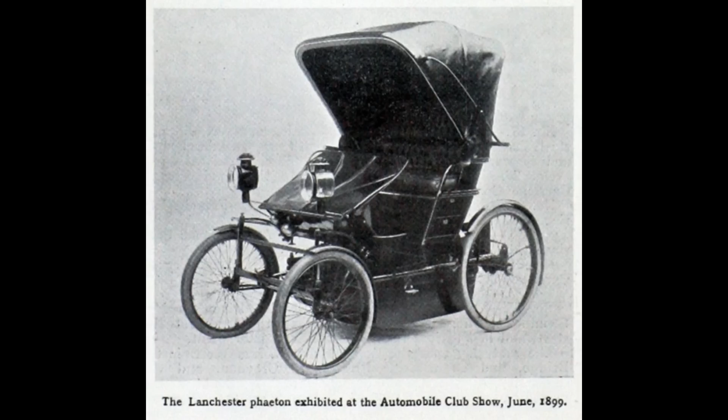That was the experience of lots of these little car companies, including a car company you've probably never heard of called the Lanchester Car Company. The Lanchester Car Company was set up by three brothers, Frederick, George and Frank, and what they aimed at was solving the problems of the car. They were extraordinarily innovative because Frederick was a very well-respected automotive engineer, and he brought his brain to the problem, and they came up with some astounding things.

They were the first company to create disc brakes. They also used epicyclic gearing in their gearboxes. However, they went bankrupt only 5 years later in 1904. The receivers came in, reorganised them, they ended up being owned by Land Rover, which of course is now owned by Tata. And the big issue that they had was it was just too expensive.

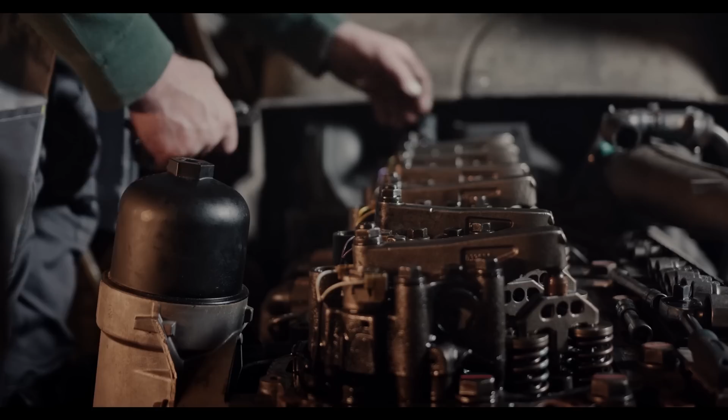Now, one of the issues that they looked at was the nature of the drive. If you think of a car now, it's 4 pistons in line, and of course they explode and lump through. The ride in a car back then was particularly rough, and the Lanchester brothers wanted to solve that problem, and they created something called the Rhombic Drive.

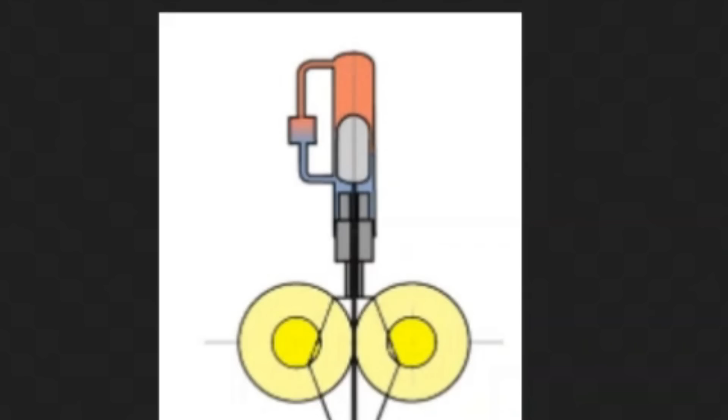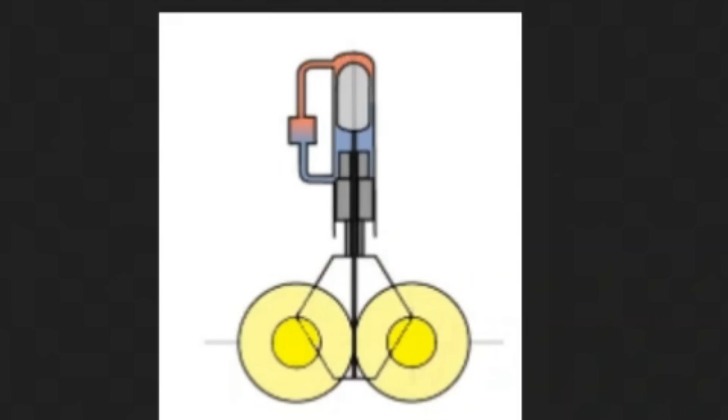In a rhombic drive, a rigid piston rod is connected to one side of a rhombus instead of a flexible rod connected to a crankshaft. As the piston moves, it deforms the rhombus. As the rhombus deforms, it's attached to 2 cranks, gears, flywheels that move in opposite directions. This distorts the other side of the rhombus, so first it flattens out, returns to its shape, and then flattens on the other side, at bottom and top dead centre.

Now, the benefit of the rhombic drive is it gives a very smooth movement from linear to rotational. The disadvantage is it's more complex, there's more parts to manufacture, and the tolerances of having a double piston system like that are quite tight indeed, meaning you don't see it much in motor vehicles these days.

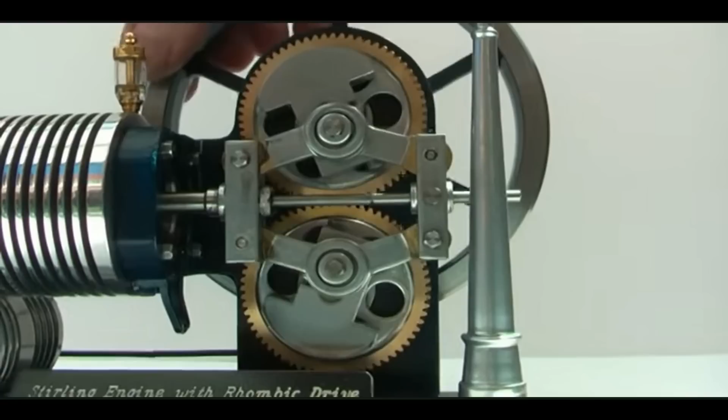But in a Stirling engine, one of the pistons isn't actually a piston, it's a displacer. The whole job is just to take up space so that the air moves between the hot and the cold side, and tolerance isn't so much an issue. So you find rhombic drives in Stirling engines even today.

So what I thought I'd do is create a rhombic drive. Now, one of the things about designing stuff is that you don't have to design everything from scratch all of the time. Here's the Tinkercad drawing I did for the hypocycloidal engine, and this is the flywheel. It took a fair bit to do, and I really quite like it, so we can reuse it in the new model that we're going to make.

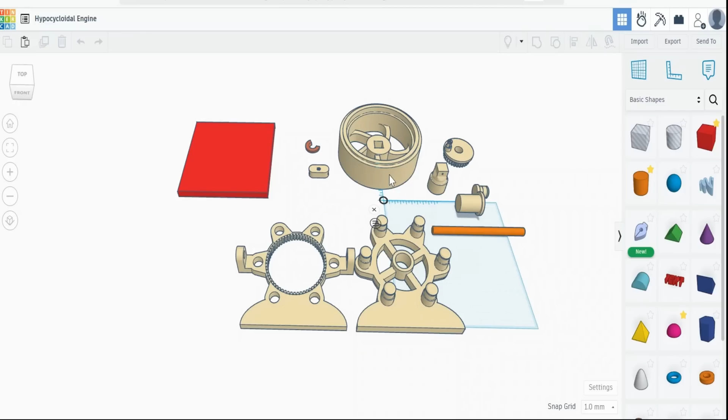To do that, just click on it and export it as an STL, and then we go back to the dashboard, open up a new workspace, and this time we can import it. And there it is. Now, there are a few changes I want to make to it because there are some things I don't like about it for this new design.

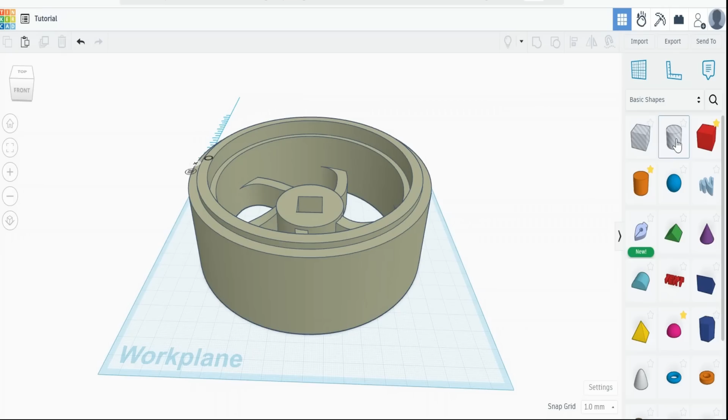For example, it's 45mm high, which I think is a bit too big, so I want to reduce it. So pull on a basic cylinder primitive that's a hole. The size of this is 150 by 150. I want it 30mm high, so type in 30 to move it 30 off the bed, and then on the size of it, type in a bit bigger than the size that you want to cut out.

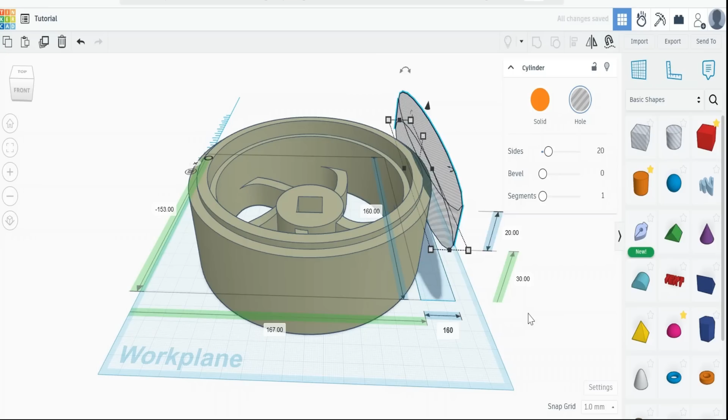Center them to each other, and then if we merge those, we've got the flywheel size I want. Now, I designed this with a square peg in the center because I wanted to link to a square peg, but we need to fill that because now I want a different kind of axle.

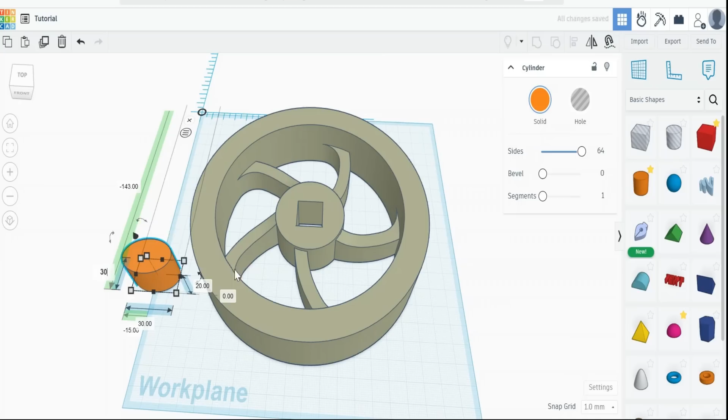So this time pull off a cylinder primitive, and it's going to be about 30 by 30. I will do that 32, so it's all the same height. Center them to each other. And if we merge that, then we'll get a flywheel.

But we want to have a center hole in it, and I want this center hole keyed. So this time, pull off yet another cylinder, and I want the axle to be 8 millimeters by 8 millimeters. And this is 30, remember. So let's make that 40 so it pokes out a little bit. It just means that we can grab it later.

Center it. And I want to key it. So I'll need a key cutting in that. I need a section of it flattened. And I want that section to be 2 millimeters.

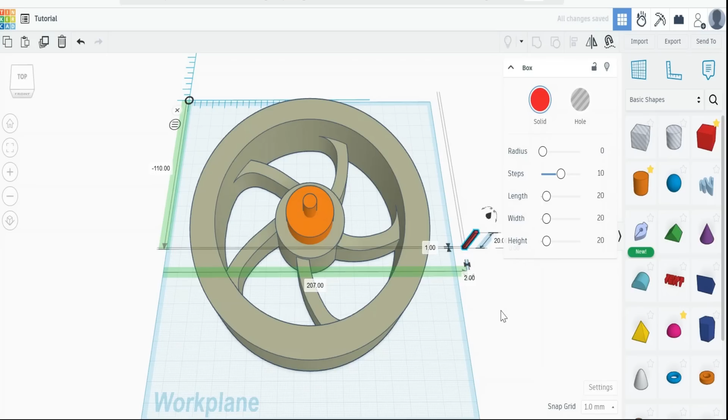Remember, this is 40, so let's make this 45. It means that we can grab it really easily. And now we need to center it to the axle. So we center it there, hit the centering, the alignment key, center it to one edge and to the center there. Now we can turn that into a hole.

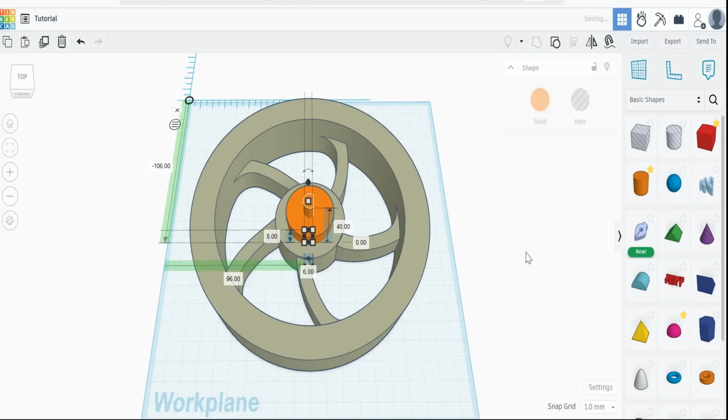We can join it with the 8 millimeter bar that we just did. So we group them, and we're going to get a flat keyway. If we click on that and now make that a hole, highlight the whole lot and group them, then we get the flywheel with a flat keyway at 8 millimeters.

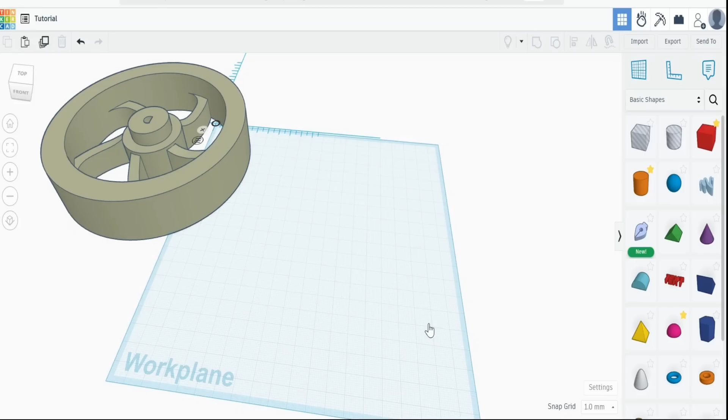The other thing that this will be really good for are the two gear sets that we need to make. But at 150 by 150, that's a bit large, so we can re-import it. But you'll notice here we've got a scale, so we can make that half the size by making that scale 50% and import it, and it will import it at half the size.

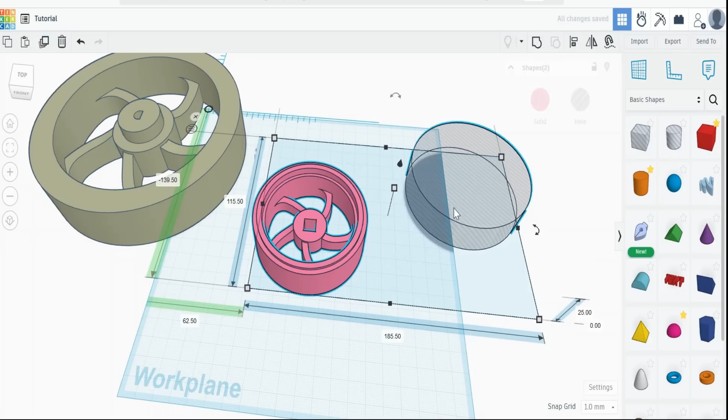And there it is. Now I want this gear to be about 5 millimeters thick, and it's 75 by 75, of course, because this was 150 by 150. So I need to shave off a bit to make it 5 millimeters thick. So if I move it 5 millimeters from the bed, make that 80 by 80, align the two by highlighting them and hitting the align key.

And then group them. We have a pretty little shape that will look nice when it comes to the gearing that we're going to do. Again, we've got this square hole, which won't do. So if we grab a cylinder primitive, smooth that out, that looks about 20 by 20 to me.

Yep, pretty cool. And then we can align those to each other. So we center it to that. And make this 5 millimeters high.

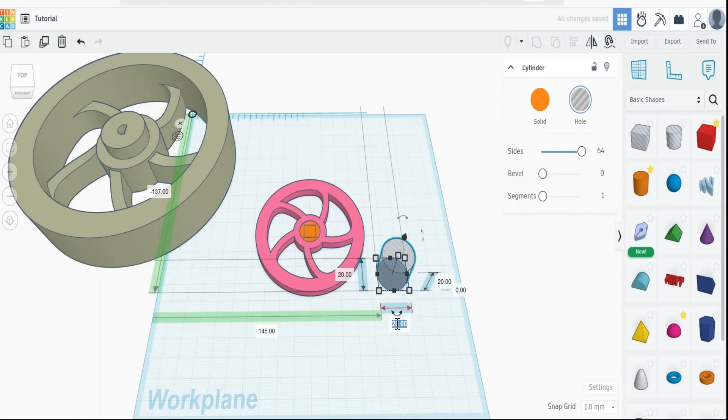And we can put an axle straight through by pulling on a hole primitive, smoothing it, 8 by 8, and then we can center the whole thing to it, group them. And there we go, we get a nice center.

Now, of course, that needs to be geared. So we go to search, type in gear, pull out metric gear. We want that to be 5 high. And you'll notice that this is 19. This is 75. So we need it to be bigger than 75.

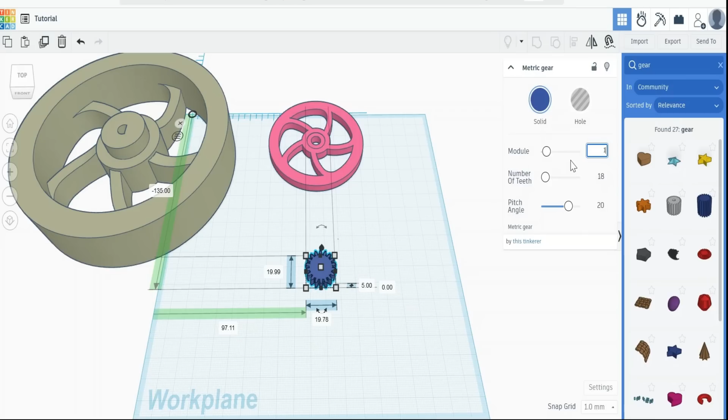Let's change the module because I think 1 is really not chunky enough. So 1.5. And so if we change that to something like 50, then we get 77. And that is 75, so we'll have 2 millimeters. It's not quite enough, so let's change it to 52.

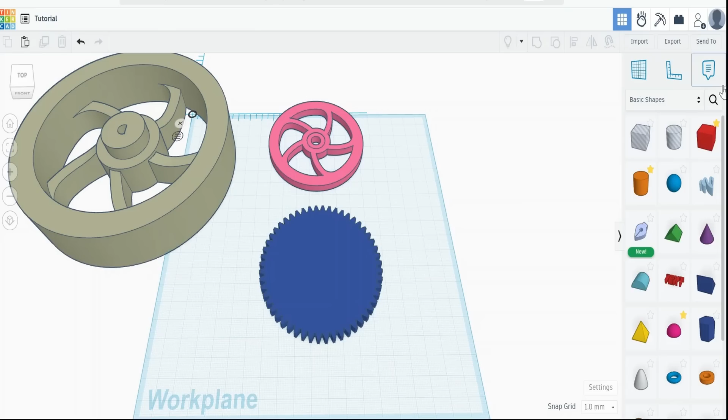Now what we want to do is place that in that. That's 75. So let's close this, grab ourselves another hole primitive, smooth the sides, make that 74 by 74, so it's just a little bit smaller than this. That means that will overlap with this later on.

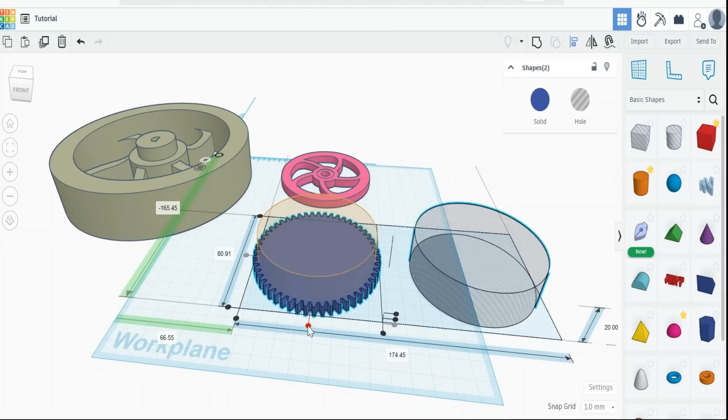And if we've aligned those two, we can check out that we're not cutting into the teeth. No, we're not. So let's group them. Then all we have to do is highlight those two and use the alignment button to align them.

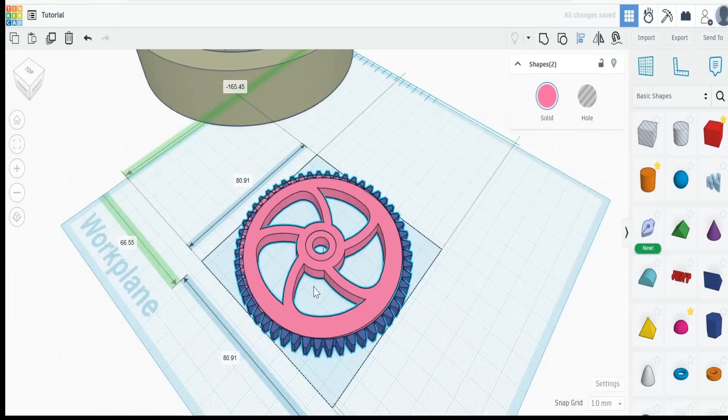And group them. Hey presto, we have our gear. Duplicate that and move it out of the way. And we have two gears and a flywheel created in a few minutes because we basically reused old parts.

Now, of course, I need to draw the other parts, and here they are. I don't plan on going into how to draw these parts because they're all basic primitives, and I have covered that in previous videos.

I will be putting these parts up on the Thingiverse should anybody want to print it off or use those parts to redesign for themselves. All I really wanted to point out was it's more than possible to reuse your parts or parts of a design to speed up your drawing process.

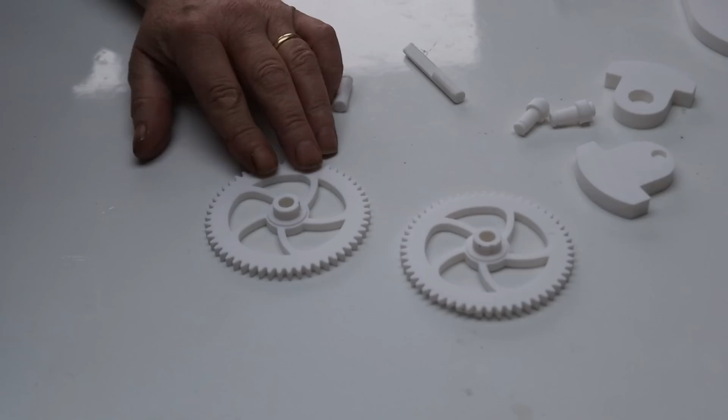Okay, let's get them printed out and put together. To put this together we have two gears labelled A and B and two axles, a long one with a flat side and a short one. Into gear B, the short one goes into the reverse side so that it's flush there, with a bit of glue to hold it into place. Then in gear A we take the long axle and shove it in there so the flat side is facing that way, and glue it into place.

And then we have two counterweights. The counterweights have this large hole with a little notch in it, and there's a corresponding notch on the gear. The counterweights go onto the notch and glue into place on both of the gears, like that. Then we take these pegs with the step in, and those pegs go into the counterweights right there.

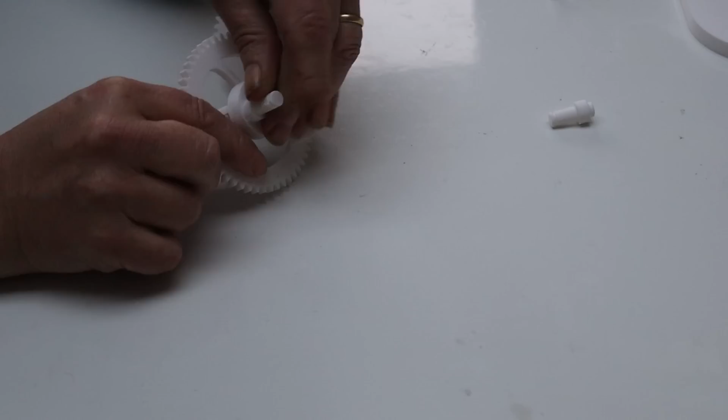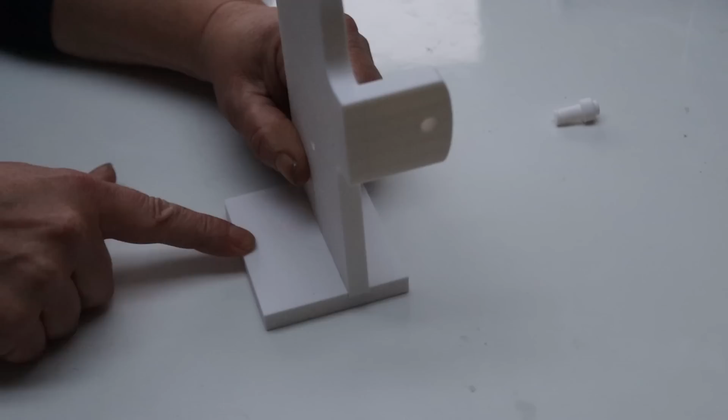Then we have the base and the back plate. The back plate's got this angled section, and you glue the back plate onto the base so that the long side of the base is back and the short side is the same as the angled section. When you've done that, take the cog with the large axle and feed it through the back plate.

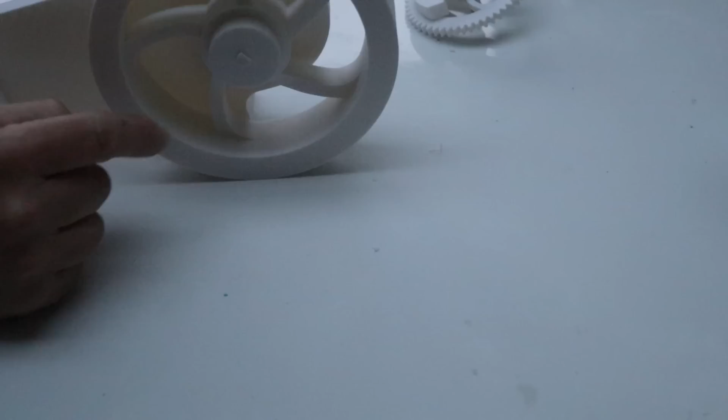There's a washer, a thin washer at 1mm, that then goes on. Then we pop on the flywheel to line it up. There we go, and right there we pop on one of these clips.

Now we want to put on the cog with the small axle, and what you do is rotate that round so that it's at 90 degrees, making sure that's at 90 degrees, and then pop the axle through, keeping them at 90 degrees from each other, which is why it mattered that it was A and B. When we've got those on, they should be in line, and when they're in line, flip it over and pop a clip on.

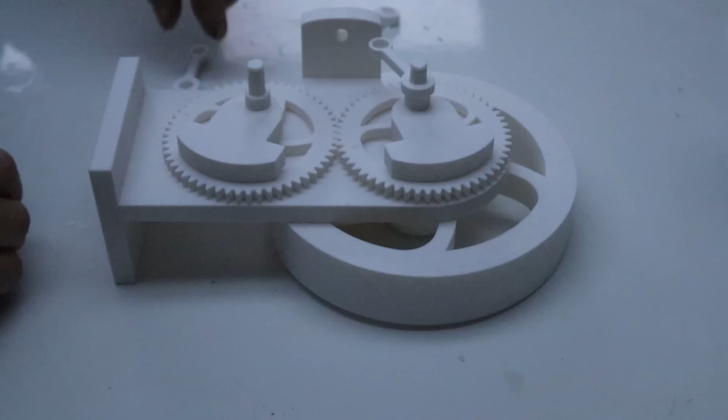Now we take our crank arms, one straight crank goes there, one straight crank goes there, then you've got these ones with a bend in the crank, that crank goes there, and that crank goes there, and again, at the top there, we pop a clip on.

Then we have these connecting shoes. One's got a 6mm hole in it and one's got a much smaller 3mm hole. The 6mm hole goes up against this here and it goes up from underneath. Then there is this arm which snaps on the top.

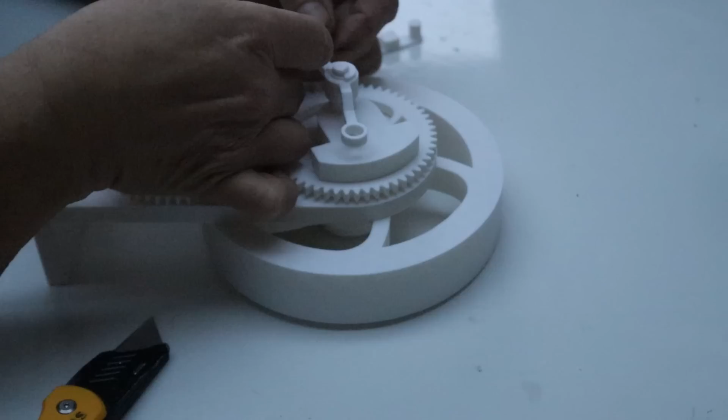And when we've snapped it down, we pop two clips and repeat that with the 3mm hole on those. Then this, which is a bit of 6mm bar with the hole right the way through, goes through there and into that 6mm section, and you glue it in place. And then this, which is a bit of 2.8mm bar, feeds all the way down into that section and again glues in place in here.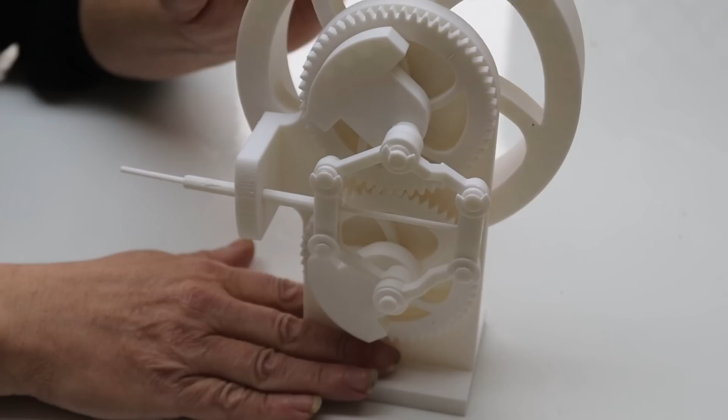And when you've done that, this is what you get, the Rhombic Drive. Now if I move the flywheel, what you can see is that these two piston rods move independently of each other, 90 degrees apart, as the rhombus right here gets deformed. Of course what we actually want to do is drive the piston rods, which will do the same thing, but we can see it moving as it should move.

Now I will put this up on Thingiverse, of course, and the link will be in the description. There is a variant of this, incidentally, where these extend to the crankcase and have a pivot point, and if you do that, you can get rid of one whole half. But this is the original full Rhombic Drive, which, as I say, is used in Stirling engines.